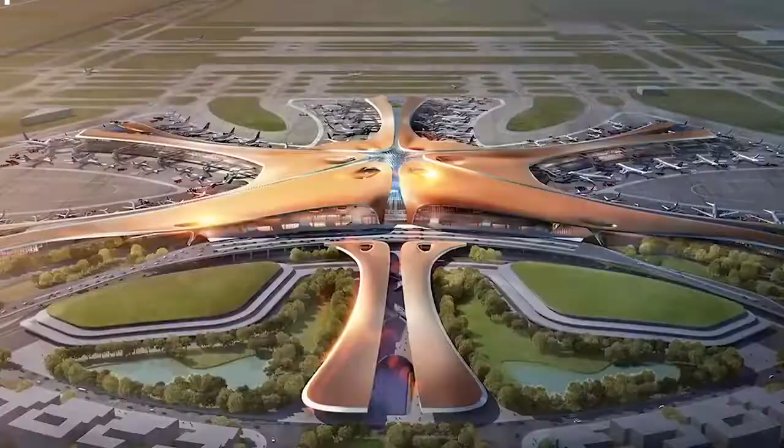What comes to your mind when you think of the world's largest construction projects? You'd be on the right track if you guessed airports, canals, and subways.

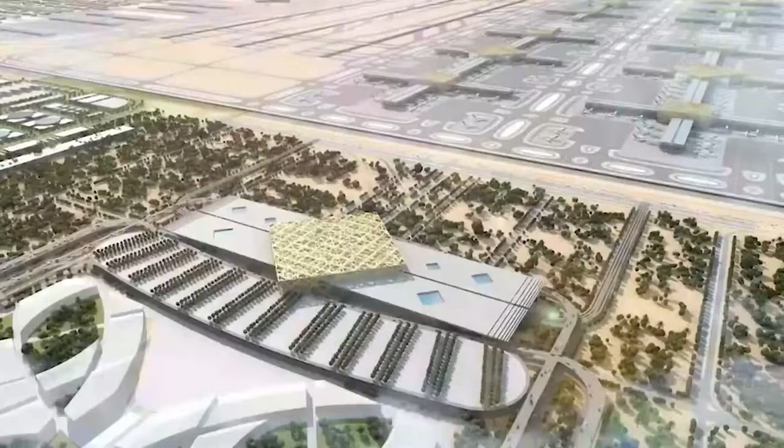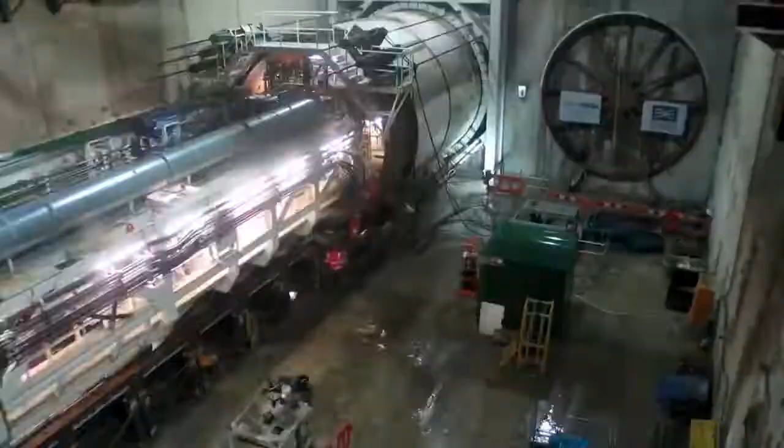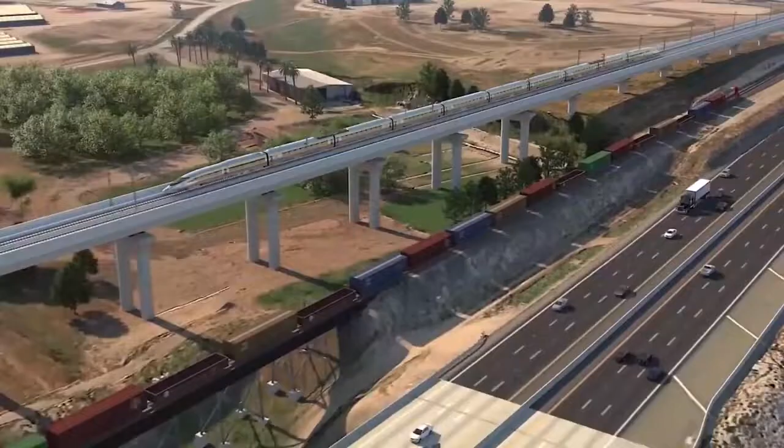Before approving a mega project, a highly specific set of circumstances must be evaluated. There are no blueprints or shortcuts for constructing a world-changing mega project. Each one must be conceived and built from the ground up, frequently in the face of significant red tape and criticism. Mega project builders embrace the unknown, even when faced with enormous risk and large cost overruns. Yet successful mega projects can achieve things never done before. They can be the pinnacles of human achievement, with marvels like the International Space Station and the United States Interstate highway system already revolutionizing the globe. They're not called mega projects for nothing, and when they say huge, they mean big.

So let's get into the number of biggest mega projects in the world.

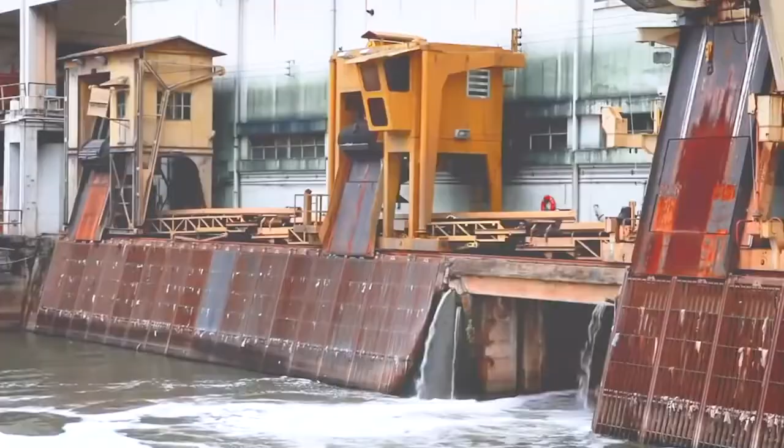We are starting with the Strategic Master Plan, Sao Paulo, Brazil. Brazil's biggest city is undergoing a mega project facelift, the Sao Paulo Strategic Master Plan. It promotes sustainment and people-oriented development, including 717,000 new homes, wider pavements, dedicated cycle and bus lanes, plus the creation of numerous green spaces. Approximately 1.2 million Sao Paulo residents live in favelas, concrete and iron shanty towns, or abandoned downtown buildings called cortices. According to the master plan, 240,000 of the new residential units will be designated as affordable. Completion is expected by 2030.

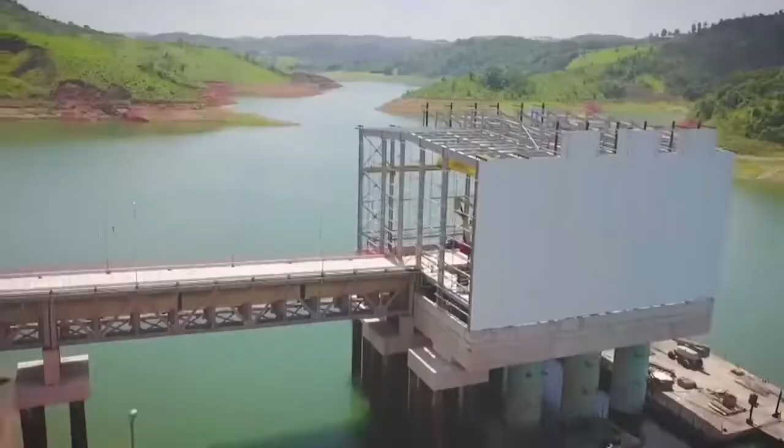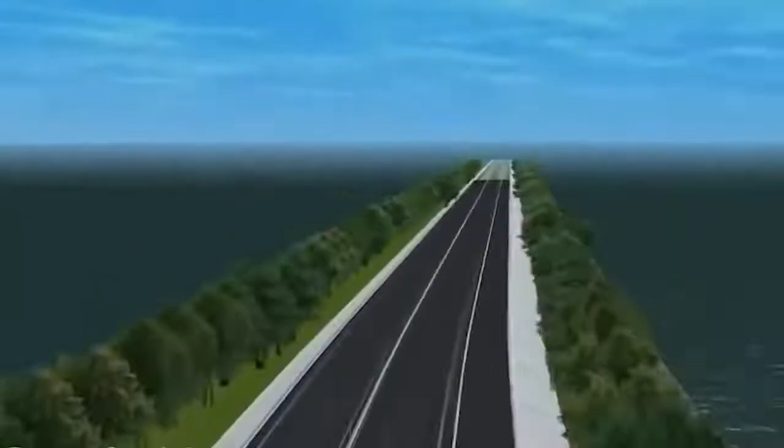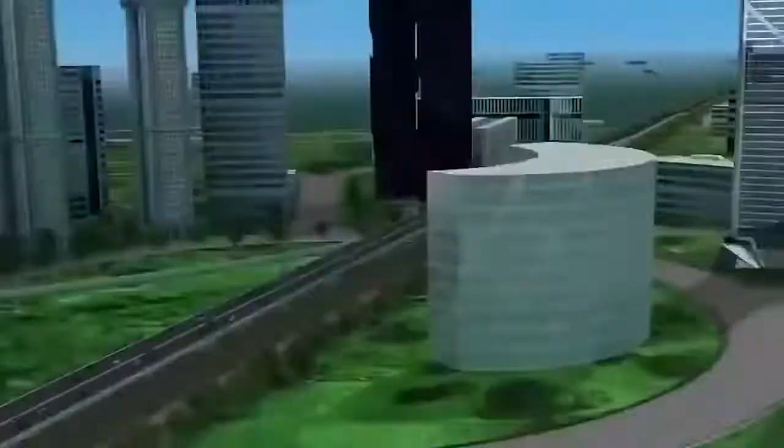Next is the Great Garuda, Jakarta, Indonesia. Jakarta, the capital of Indonesia, is the fastest sinking city in the world. The metropolis of 36 million people, which is prone to flooding, is sinking at a rate of 5 to 10 centimeters a year. Without a mega project to protect it, the low-lying city could be submerged and its entire population displaced by 2050. The National Capital Integrated Coastal Development Master Plan has an estimated cost of $40 billion. It includes construction of a massive 32-kilometer seawall known as the Great Garuda, shaped like the Indonesian mythical bird. Construction of the seawall has started and been delayed many times, but completion is optimistically scheduled for 2025.

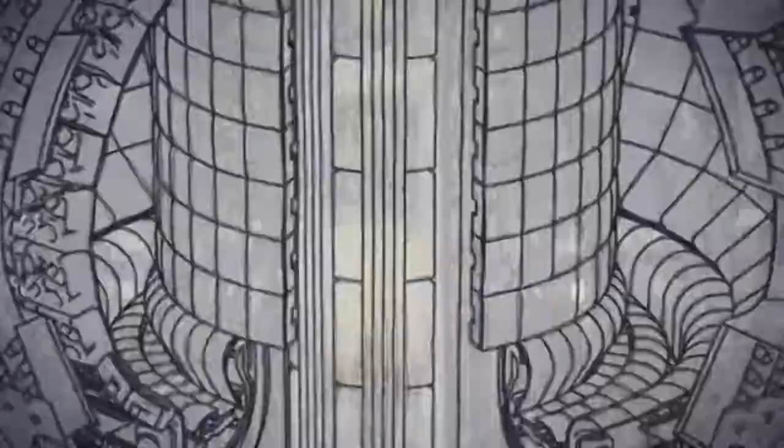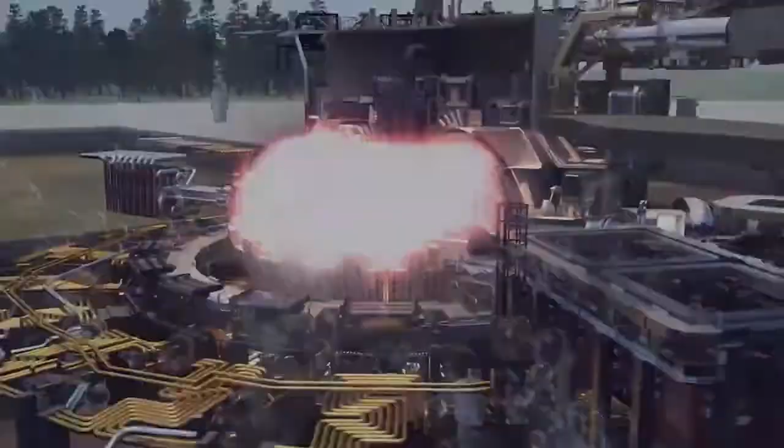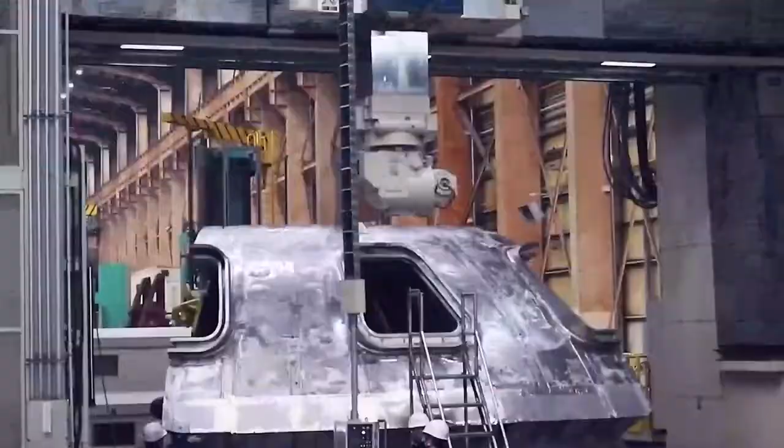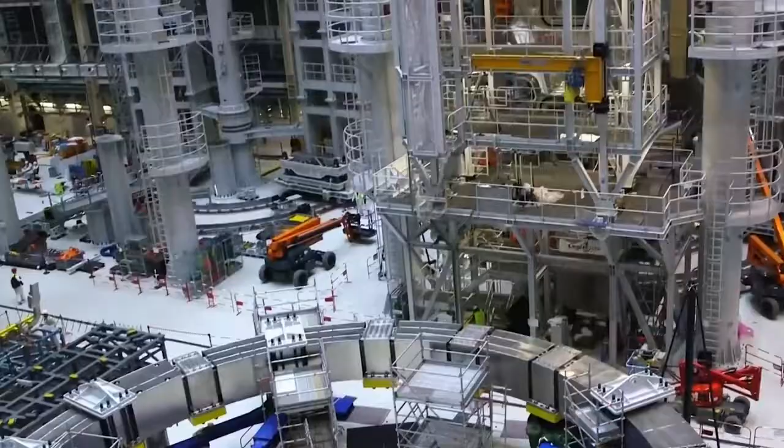We have ITER France, the International Thermonuclear Experimental Reactor. It's an energy project between 35 nations currently under construction on a 180-hectare site in southern France. The collaboration is building the world's largest tokamak, a magnetic fusion device, designed to prove the feasibility of fusion as a large-scale, carbon-free source of energy based on the same principles that power the sun. 39 buildings and technical areas house the ITER tokamak and its plant systems. The heart of the facility, the tokamak building, is a 7-story structure made of reinforced concrete that sits 13 meters below the platform level and 60 meters above. Construction of the vast building, which began in 2013, requires 10 different types of concrete to shield workers from radiation. The $20 billion center is due to come online in 2025.

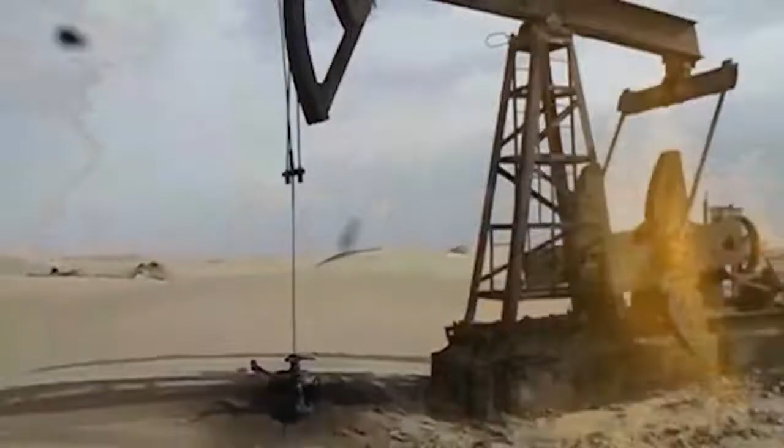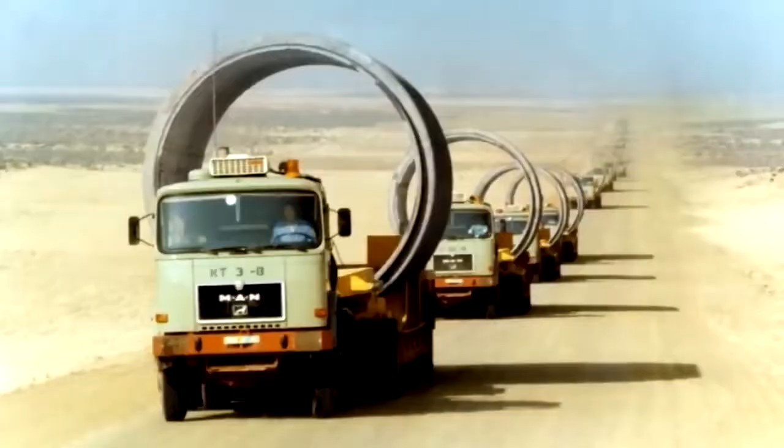The Great Man-Made River Project, Libya. The Great Man-Made River, or GMR, has been an ongoing project since 1985. To this day it's classed as the largest irrigation project in the world, and upon completion it will supply water to more than 350,000 acres of arable land. Not only will it assist Libyan farmers with its produce, but it will also increase the availability of clean drinking water in most of Libya's urban centers. The water source of the GMR is the Nubian Sandstone Aquifer System, the world's largest known fossil water aquifer system, and the project's completion is slated for 2030.

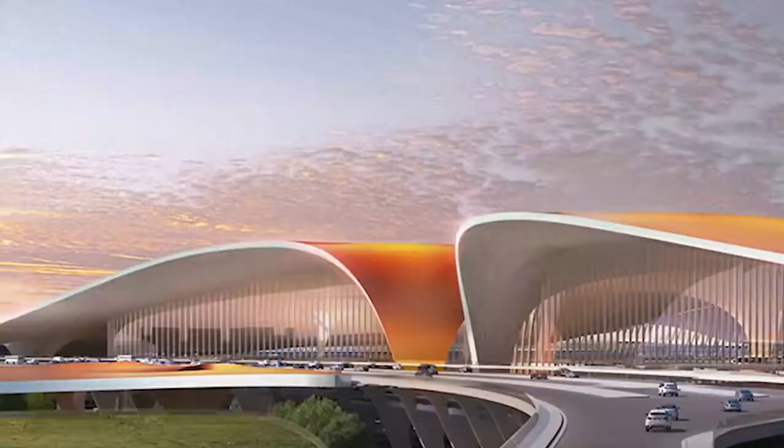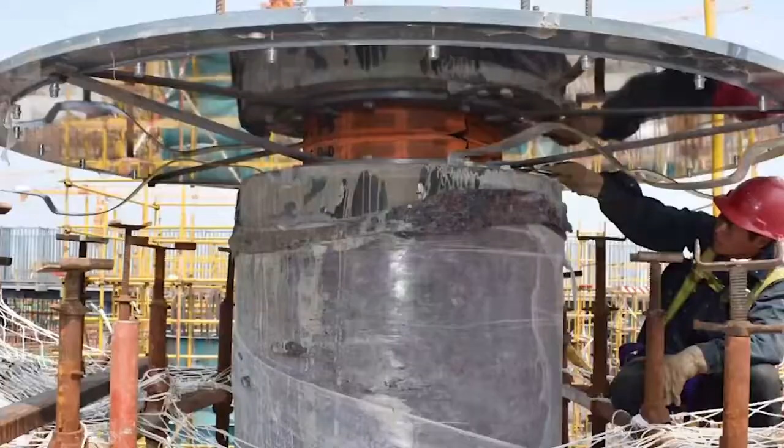Next is the Beijing Airport in China. Unsurprisingly, as China looks to stamp its dominance on every aspect of global life, its construction projects grow in size. The Beijing International Airport is eventually surpassing Dubai's Al Maktoum International Airport in cost, total square miles, and passenger and plane capacity. The project's first phase was completed in time for the 2008 Olympiad, and teams behind the construction intend to complete further expansion by 2025.

Chuo Shinkansen in Japan. Moving swiftly along the worldwide rail network, Japan's officially named Linear Chuo Shinkansen high-speed rail line will transport passengers 286 kilometers from Tokyo to Nagoya in a mere 40 minutes. The trains on this line will power along at approximately 313 miles per hour, based on the country's world-leading superconducting magnetic levitation, or maglev, system.

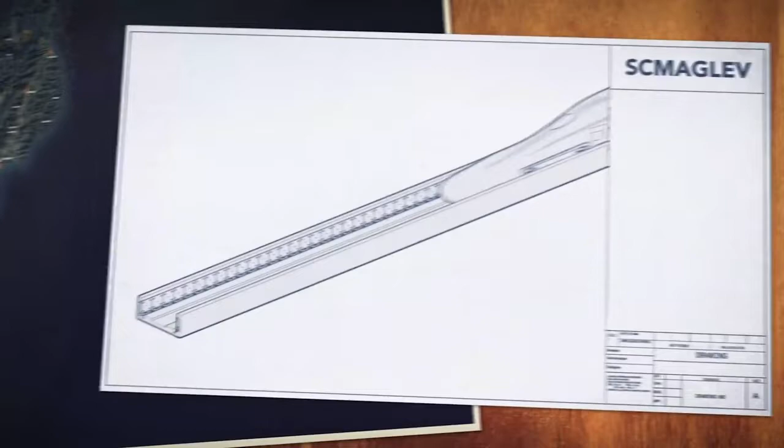Approximately 86% of the new line will be underground, requiring extensive tunnel construction. The project is scheduled for completion by 2027, before work continues to extend the line onwards to Osaka.

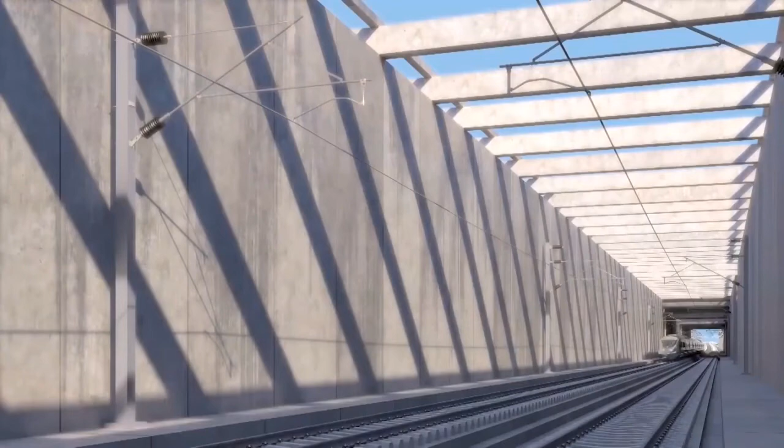The high-speed railway in the United States: the California High-Speed Railway Network project started back in 2015, with an estimated completion date around 2029, though COVID-19 may disrupt that. The high-speed trains will connect 8 of the 10 largest cities in the state, reaching from San Diego in the south to San Francisco in the north.

The project has 2 planned phases. Phase 1 will connect Los Angeles to San Francisco. Phase 2 will extend connections to San Diego and nearby Sacramento. The high-speed rails show the West Coast state's drive for sustainability, as each 200-mile-per-hour train will be 100% electric, powered only by renewable energy.

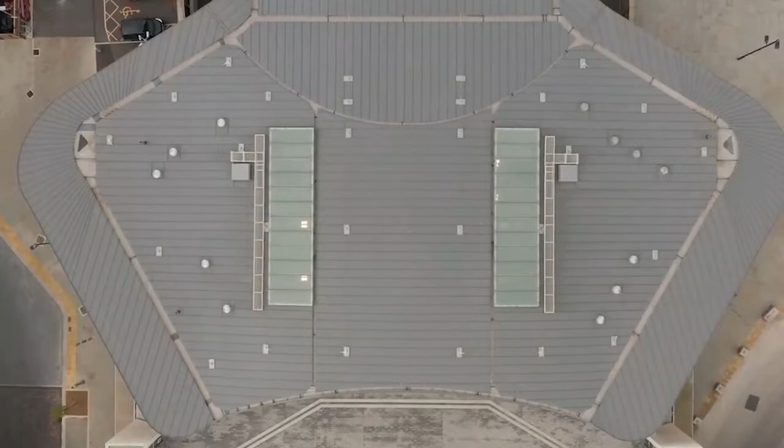Next, the London Crossrail project. Did you know the London Underground system of trains was the first of its kind? A lot of people don't. Fun fact aside, to this day the London Underground continues to grow exponentially larger. Currently, teams are coming to the end of an almost 13-year project, adding 26 miles of tunnel connecting 40 stations to the existing network, known as the Elizabeth Line.

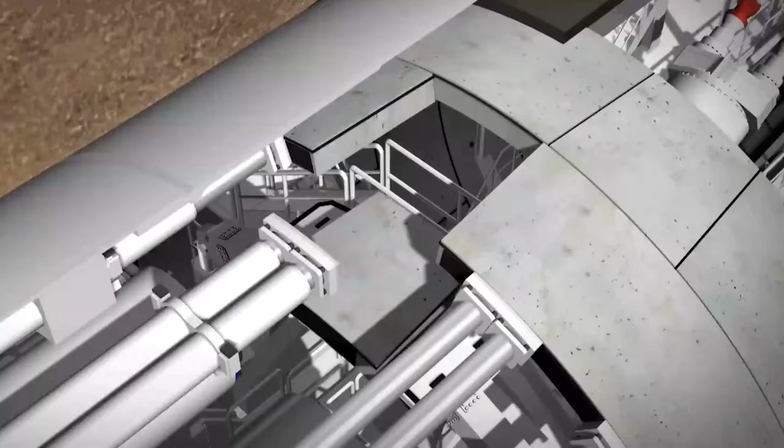The bill? An estimated $23 billion. Currently, delivery of the Elizabeth Line, already in its complex final stages, is being completed at a time of great uncertainty due to the risk and potential impacts of further COVID-19 outbreaks. The team behind the scenes expects to bring the line into passenger service as soon as practically possible, possibly in the first half of 2022.

The South-North Water Transfer Project, China. If you've ever looked at China's population distribution and water resources, you'll notice that it's a little lopsided. The north of the country contains over half of the population, but just 20% of the country's water resources.

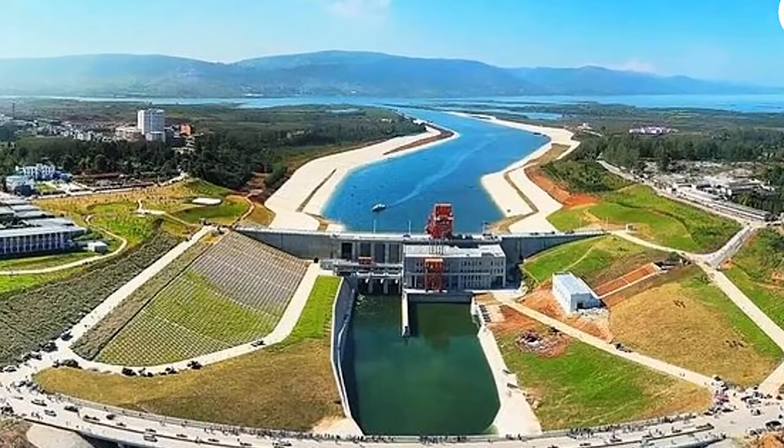It's a huge disparity. To address the issue, the Chinese government has set aside funds for the construction of 3 massive canals. Each canal will be over 600 miles long and will transport water from China's 3 main rivers to the country's northern regions. The project will take a little under 50 years to complete and will provide an amazing 44.6 billion cubic meters of water every year.

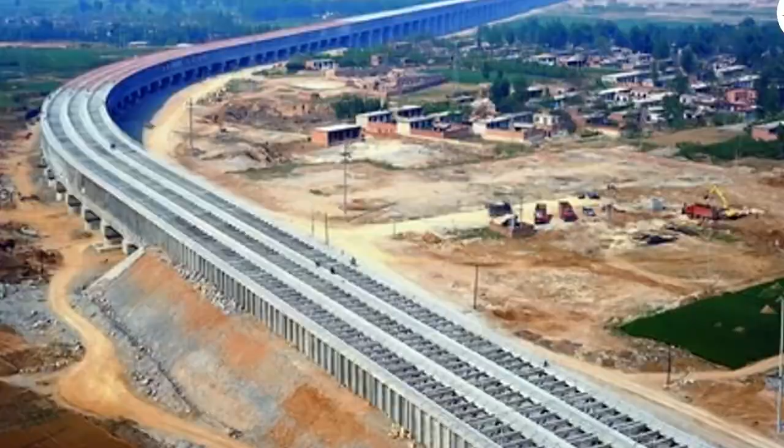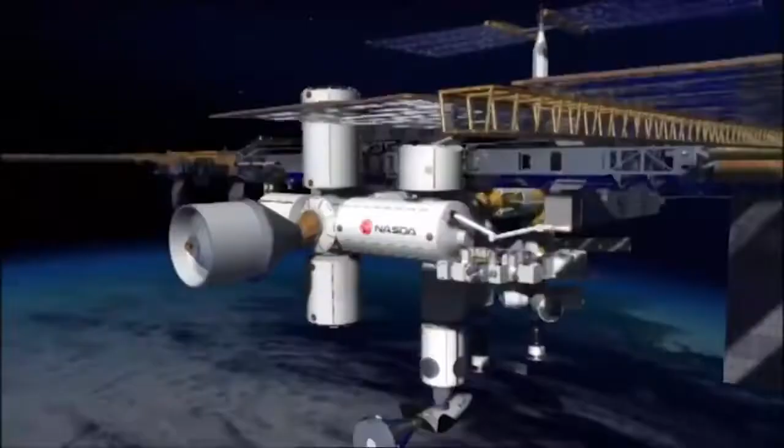Next is the International Space Station, in space. Okay, so it's not really in the world, but it is off the world. The ISS, built by a cooperation of 15 nations and 5 space agencies, is due to undergo $60 billion in upgrades.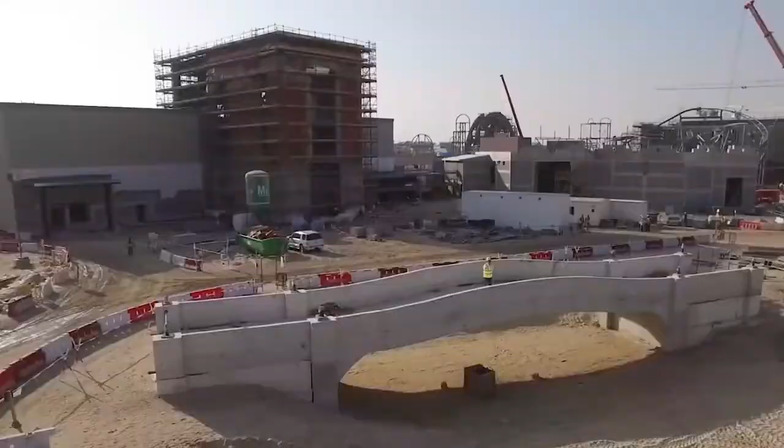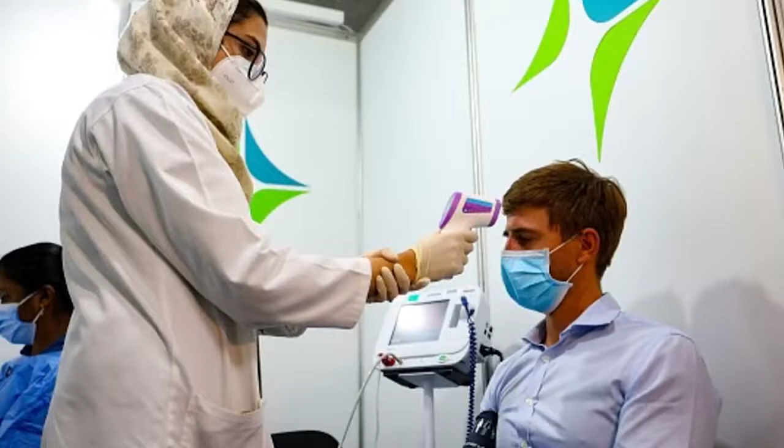Dubai Land, Dubai. Isn't it true that Walt Disney World is enormous? Consider combining 3 of them and cramming them into a single site. That is what Dubai World intends to do with the Dubai Land complex. The $64 billion destination would cover 278 square kilometers and will have 6 sections: ecotourism, health facilities, hotels, science attractions, sports centers, and for adrenaline addicts, entertainment parks.

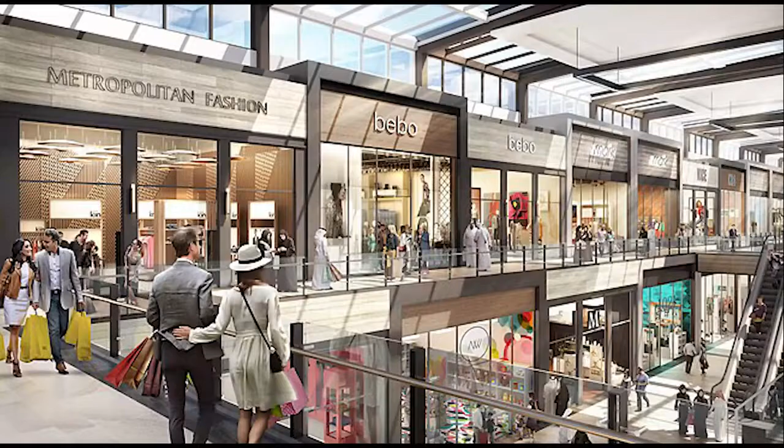Because the project is unique to Dubai, it's only inevitable that it will set a record. On this occasion, Dubai Land will include the world's largest hotel with 6,500 rooms and a 10 million square foot shopping mall. However, you'll have to wait until 2025 to see it for yourself.

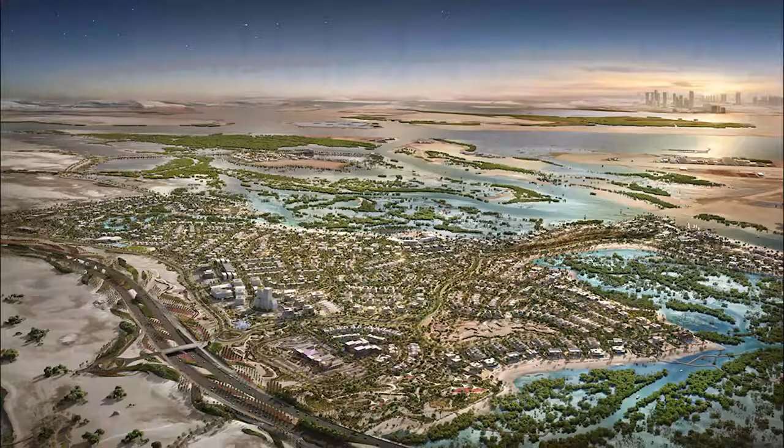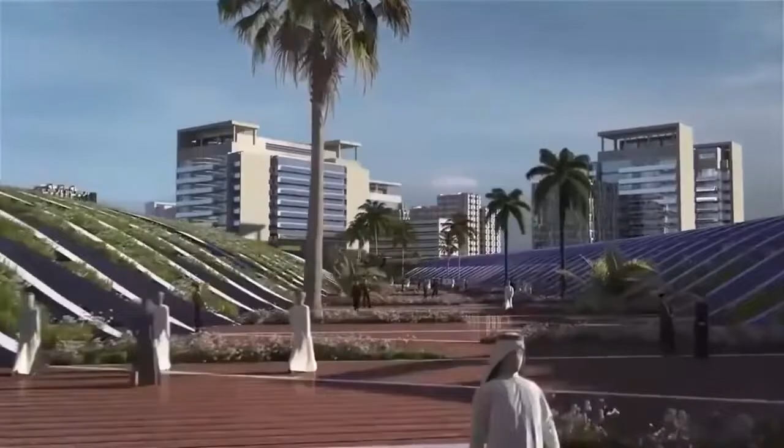Following Dubai Land is Jubail II, Saudi Arabia. Jubail II is a 22-year-long project that claimed to create an industrial city from the desert sands 3 decades ago. The second phase of the Jubail development, the world's largest civil engineering project, began in 2014 with an expansion budget of $11 billion. Jubail will have at least 100 industrial plants, an 800,000 cubic meter desalination plant.

More than 530 miles of railway and road, and a 350,000 barrel per day oil refinery when completed. The project is expected to be completed in 2024, with approximately 50,000 residential units added to the industrial city by 2026.

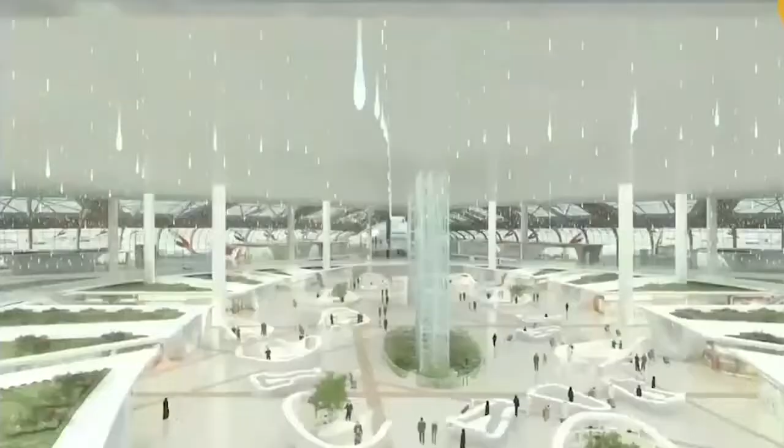Lastly, we have the Al Maktoum International Airport, Dubai. If you've ever seen London Heathrow, you'll understand what a large airport looks like. That's 4.6 square miles, which pales in comparison to the incredible 21 square mile area of Al Maktoum International Airport.

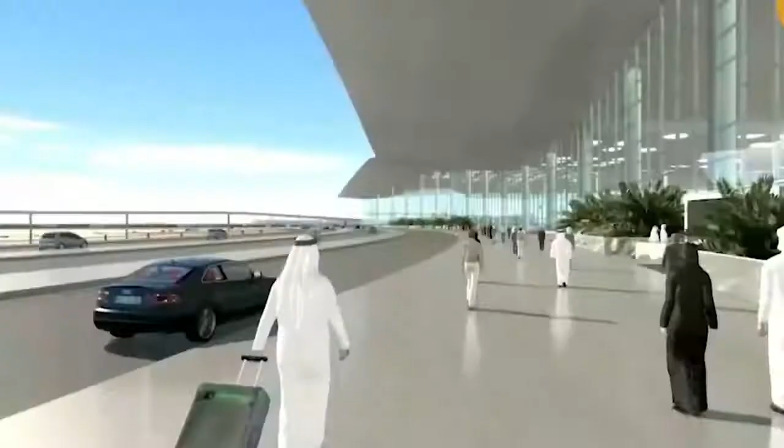Dubai's Al Maktoum Airport is intended to handle 200 wide-body planes at any given time, and it's only going to get bigger with the airport's second expansion, which has no set completion date and is anticipated to cost a staggering $32 billion.